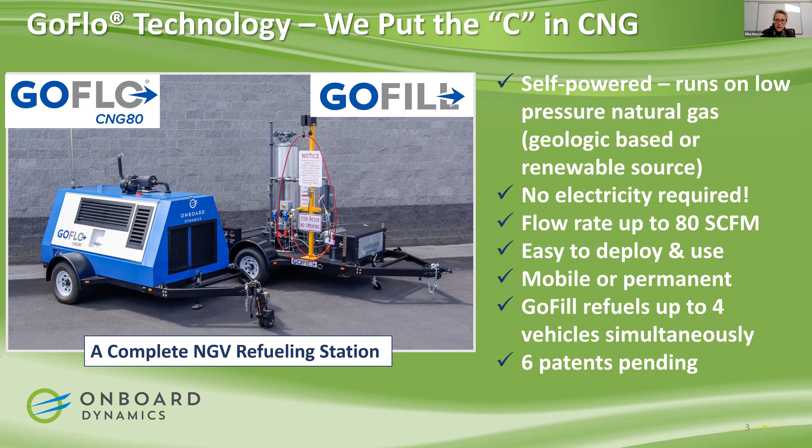So when the GoFill is packaged with the GoFlo compressor, it becomes a complete natural gas refueling station, all without electricity and mobile. So just a little bit closer look under the hood, so to speak, of our system. The core compressor platform is based on a V8 industrial engine, whereby 4 stages of compression are performed by one bank shown here and powered by natural gas using the other bank.

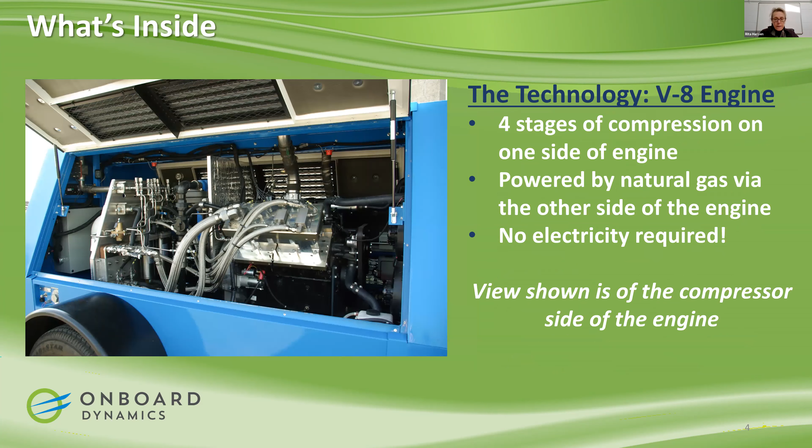And I just have to say, for this particular application this summer, we showed up at 10 a.m. in the morning with the GoFlo and the GoFill system, and by 3 p.m. we were refueling that truck with their local natural gas supply. So pretty easy and convenient for on-site refueling. We call it CNG in a day.

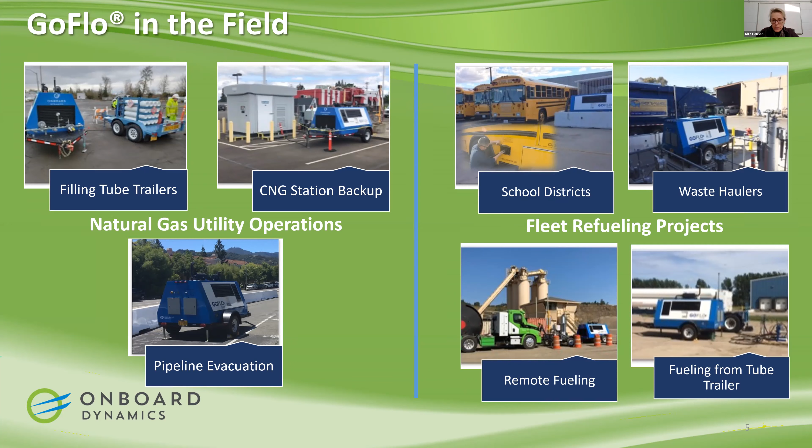So he is saving $1,000 per truck per month in fuel costs alone for his 12 trucks. So 12 grand a month in savings. By using renewable natural gas, he's reducing emissions by 22 tons of CO2 equivalents per truck each month. So that's a really motivating aspect of what we're doing. So that is what we sell today.

And really the ability to perform compression the way we do just brings us so many opportunities where that's important. And we're now seeing it's going to open up even larger markets beyond refueling and utility operations, which is why I'm here today to talk about the new innovation, because as part of our product roadmap going forward, we are going to be incorporating cleaning and conditioning capability on the front end of our core compressor platform. And this will allow us to go after renewable natural gas and flared stranded gas applications in a big way.

And these applications are already coming to us. So this is a solution to a methane problem that is ever growing. And since our product launch, customers and industry have been approaching us, asking us for this product that combines our unique natural gas compression platform with this upfront gas cleanup and conditioning capability.

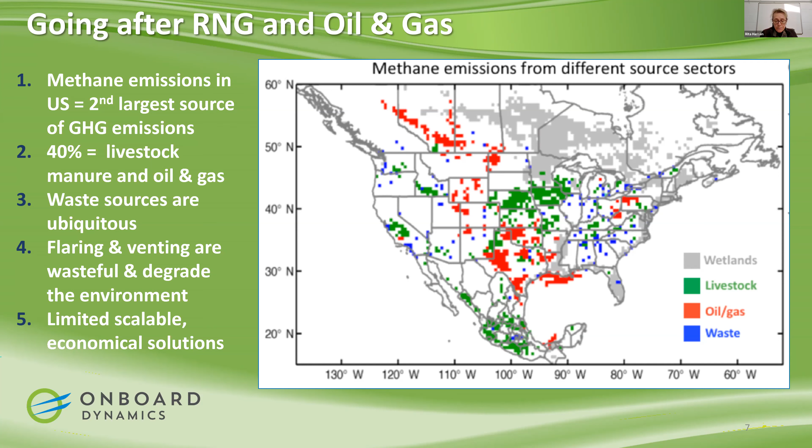It's also going to be electric and diesel free. It will be mobile on a self-contained flatbed trailer, and it's going to produce fuel grade methane that can be used for either local NGV refueling or transported via tube trailer to a pipeline or to be sold into other markets. And it will be cost effective. So we expect to hear about this proposal in the next 30 days.

We actually secured 14 letters of commitment and support from commercialization partners and industry players for the development of this solution. Some of you who've made those commitments are on this webinar today. I know that. And we already have 2 demonstration sites committed, both on the dairy side here in the Pacific Northwest and on the oil and gas side in Texas.

So our timeline on this fully integrated system, once we get notified that we're moving forward, would be actual deployments in 2022. So it's basically a year to get the funding in place for this product development and to do the engineering and build out the first systems. And we're targeting 4 demonstration sites, 2 on the RNG side and 2 on the oil and gas side.

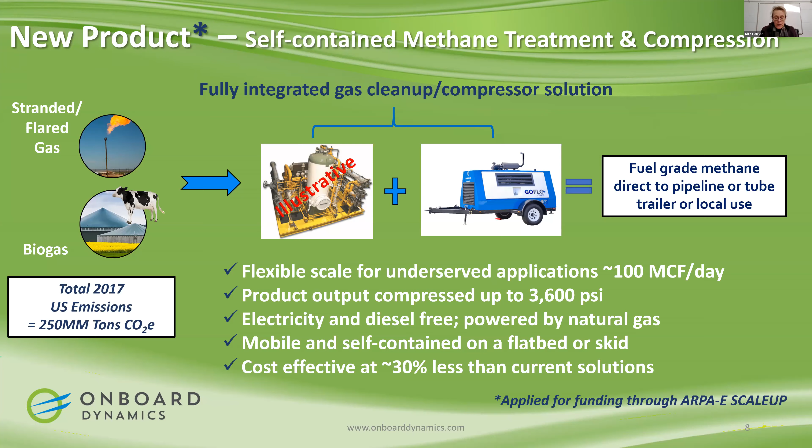So since there might be customer prospects on this webinar, I would be remiss if I didn't talk about what we're selling today, our current product offerings. So, as many of you know, we're actually in a direct sales capacity. We're selling our compressor, we're selling our refueler, we're selling it as a package, but we also are offering leasing and compression as a service opportunities and service and support contracts and cloud-based data management packages based on the back-end data collection capabilities that we have built into the product.

And just as a go-to-market, since you're kind of part of my local support ecosystem, we have received significant US interest and also international interest. I have to tell you that I was this morning talking to somebody in London, and yesterday I was corresponding with somebody in India. But we're focused here in the US right now on transportation refueling and supporting natural gas utility operations through our methane mitigations. But we really are super excited about the fact that we're on people's radars outside of the US.

And we are going to be deploying our first compressor into the Canadian market with our partner in BC. And through our contract with NRCan, we're actually getting support to get all the certification requirements to be able to deliver that system. So that's super exciting for us. So it's US first, Canada second, and I'm thinking it's Mexico and Latin America after that, but India's got such a strong pull as well.

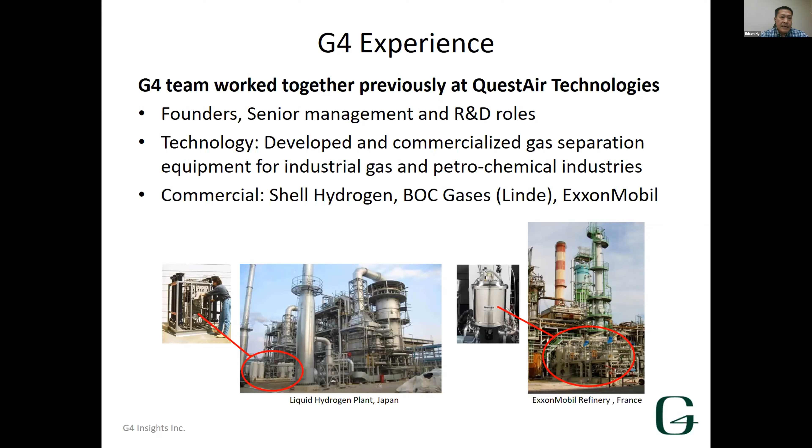What we found was that methane, if you can make it a pipeline grade product, did have an immediate and large and growing market for renewable natural gas with gas utilities. One of the challenges we found was that a lot of the existing sources, being landfill sites and digester opportunities, are already actively pursued. The big sites are probably already done, and the feedstock opportunity was going to be diminishing over time. So in our current company, G4 Insights, we didn't want to pursue further technological development in those feedstock types. What we are focused on is the next feedstock opportunity, which would be primarily forestry biomass.

So when the forest industry goes out to harvest trees for making lumber, the tops of the trees, the branches of the trees, all of that is left behind as roadside debris, generally just gathered and burned. And then at the mill site, there's the mill waste from the sawdust, the bark and the other materials that are left behind. Sometimes it's used for pellets. Sometimes the quality is not good enough for that even. So again, it's just a waste product.

And what we do in our process is a little different than some of the other technologies being developed, in that the more conventional approach is to take the biomass and gasify it. That means to heat it under quite high temperatures, like 800-900 degrees C, to create a syngas, which is primarily hydrogen and carbon monoxide, and then convert that into methane using the methanation process. That process is generally quite complex and quite expensive, because the syngas needs to be a very clean, tar-free product that doesn't foul up some of the catalysts in the methanation step.

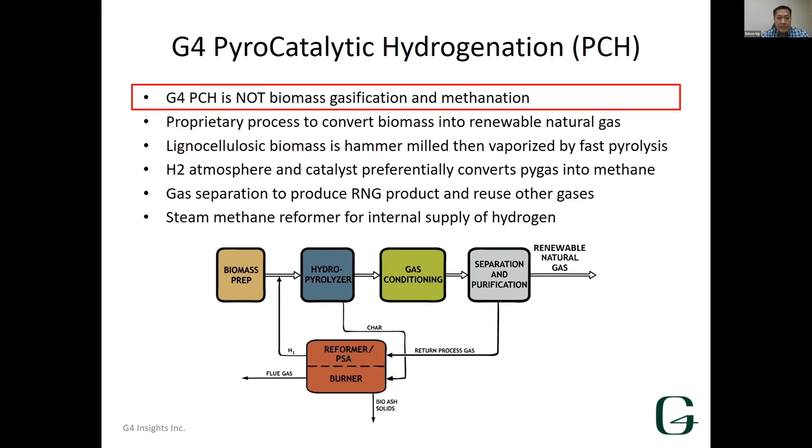So that's our technology. And at a commercial scale, our next project we're targeting, we believe entry-level size is roughly about 36 dry tons of biomass a day. Output from that unit would be about 450 gigajoules a day of renewable natural gas. CapEx roughly 20 million, and selling price for the numbers to work is about the current renewable natural gas in North America, and in Europe it can be up to double that. So that's a worthwhile entry point at that scale.

Where we want to get to in North America, of course, is that we do have larger forestry operations, and sizing something that matches the available residue from a typical larger North American sawmill, there's about 750 dry tons a day of biomass available. And that would produce about 10,000 gigajoules a day of renewable natural gas. CapEx for a larger plant like that is about 140 million.

And because of scaling, we can actually still make money in the sort of $12 to $15 a gigajoule range, which is extremely competitive, especially when you consider the scale at which we're producing this. So instead of poking many, many holes for small biogas plants to inject into grid, you're putting essentially a wellhead size injection for each of our large plants. So it's very attractive for the gas industry and of course the investors in the plants.

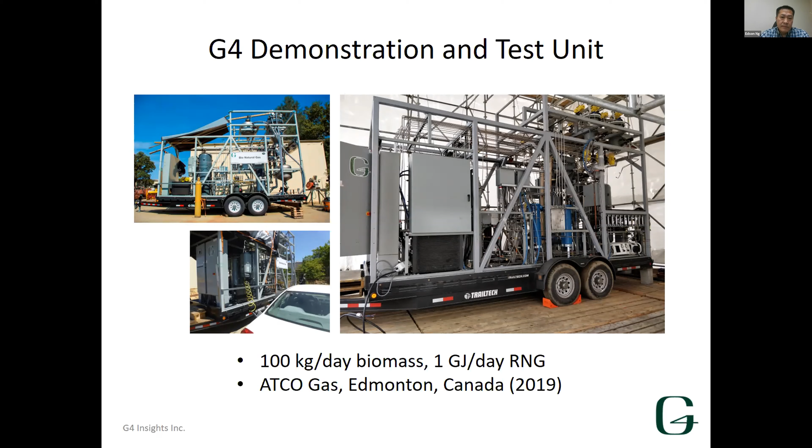Some of the other applications that we have for this technology: previously I described that we can make renewable natural gas, and we also needed hydrogen as part of that input. What we can do in power to gas, and where this comes into play, is that with the growth in wind and solar projects, there's a lot of overproduction of renewable power when the wind's blowing and the sun's shining, and it doesn't match the usage profile.

So the utility industry is looking at things like storage of that power, whether it's batteries or flywheels, compressed air, pumped hydro. Some of the larger scale opportunities is to convert that excess renewable grid power with electrolyzers and make hydrogen. And then the hydrogen could be used for end uses like fuel cell vehicles and things like that. But in the meantime, you could also use our technology to convert that hydrogen into renewable natural gas.

And the platform to do that is exactly as I described before, except we don't need an internal supply of hydrogen because we'll use an external supply of hydrogen, and that displaces the need for the steam methane reformer. It also eliminates the need for us to sacrifice some of our methane as the feedstock for that hydrogen. The result is we double the output of the renewable natural gas produced. So we can get 20,000 gigajoules a day from the same amount of biomass going in.

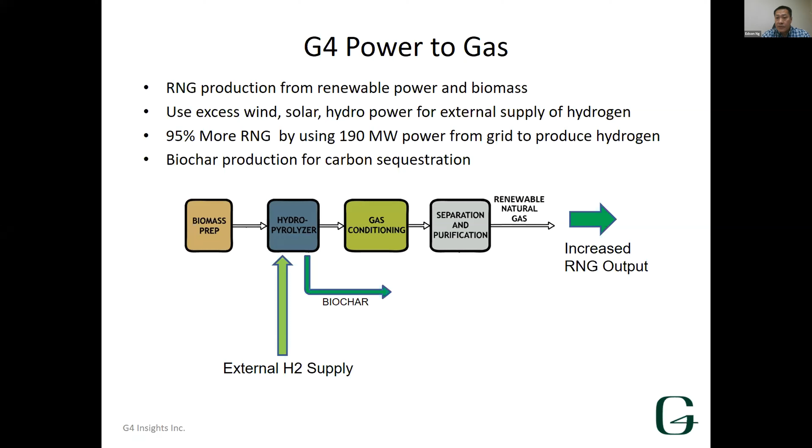And to give a sense of the scale at which we're able to offload the excess grid power, one of our large plants would use about 190 megawatts of power to produce the hydrogen on a steady state basis. But the peak period that you want to draw this excess grid power is about 8 hours of the day. So during peak times, it's about triple that. So imagine 600 megawatts of excess grid power coming off the grid to make the hydrogen and then into a single large RNG plant. So that's a lot of storage. In this case, it's transforming low or negative price power into a high value CNG or RNG product. So that's power to gas.

Another application for the same technology is green hydrogen. Right now, it's RNG focused for the industry. Most of the roadmaps, whether it's North America or Europe, foresee a very large growth in hydrogen. A lot of that's driven by the wind and solar opportunity that I mentioned previously. But we can also participate in that by combining biomass and conventional steam methane reforming technology. So I'll describe this green hydrogen concept.

We take biomass, we use the G4 technology to make renewable natural gas and a biochar. That gets fed to a steam methane reformer where the feedstock is not fossil natural gas, but renewable natural gas. The burner is being fueled by biochar instead of methane. The output of the burner, the flue gas, is no longer a greenhouse gas because it's biochar going in. So you don't need to chase the CO2 in the flue gas, which is very difficult and expensive.

The output is a hydrogen-rich gas from the reformer. It goes into a G4 gas separation system, which produces two streams. One is a high purity hydrogen stream, which is green hydrogen. At the same time, we're able to isolate the CO2 stream from the reformate, such that you have a low cost, high purity CO2 stream available for sequestration. So you can get negative carbon intensity green hydrogen using this technology.

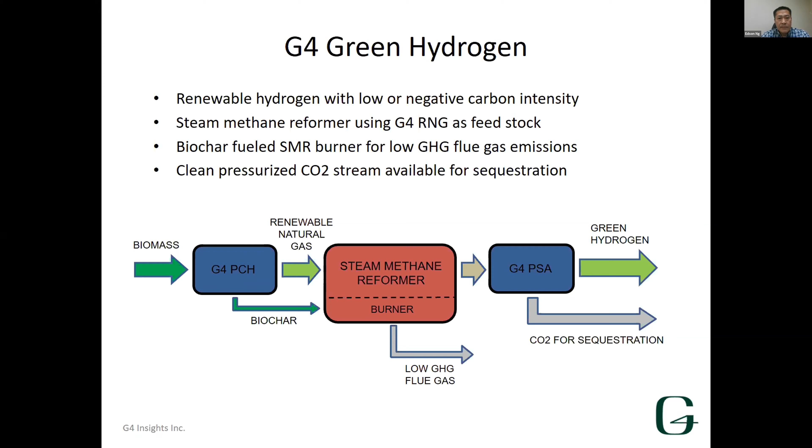And the last example is blue hydrogen. It's a similar approach, but the twist here is that we're using fossil natural gas into the steam methane reformer as the feedstock. However, on the burner for the steam methane reformer, we're using renewable natural gas produced using the G4 process. The flue gas is carbon neutral because it's renewable natural gas going into the burner. There's biochar being produced that is not being utilized, so that sequesters carbon.

The reformer outputs the reformate into the G4 gas separation unit, which produces, in this case, high purity blue hydrogen, which means it comes from fossil fuel origins, but it's low carbon intensity. At the same time, we're capturing CO2 from the reformate stream available for sequestration. So in this approach, we're also producing low carbon blue hydrogen with negative carbon intensity as well. So these are all the scenarios with the same technology that we can pursue today.

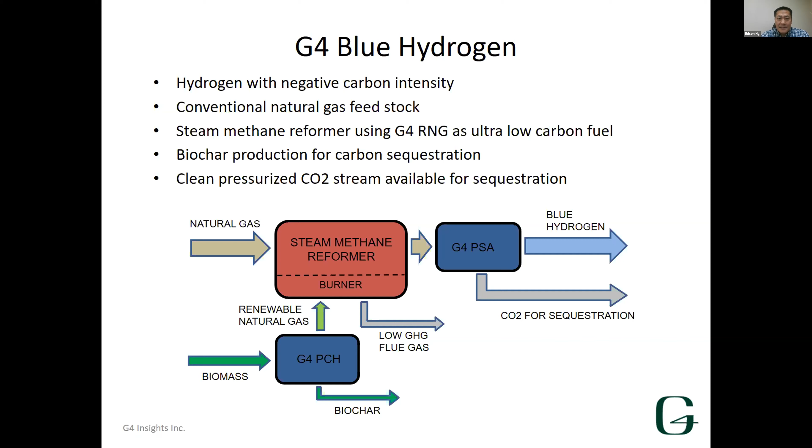Great, thank you, Edson. That's terrific. I didn't have any questions for you. I had a dozen questions going through my head. That was a very rich presentation.

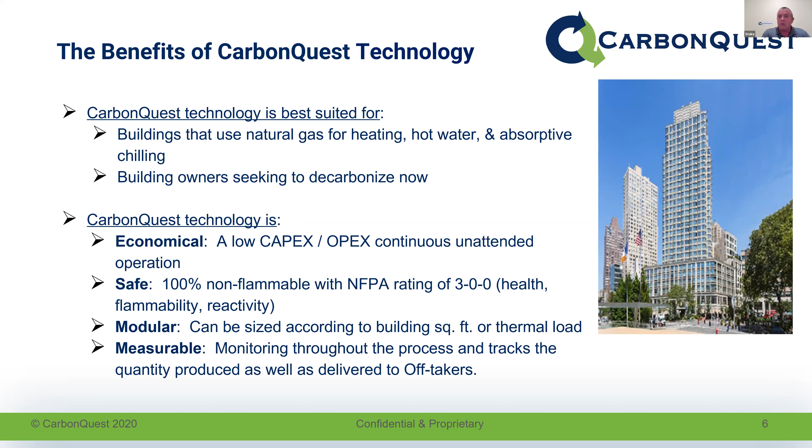And so what we've put together, we think is economical. It's got a low CapEx perspective. It's safe for installing systems in a building. It's modular. We can size this up and down based upon the usage in the building. And more importantly, it's measurable. So we're able to measure the carbon that we're capturing and liquefying and then transporting out. I'll go through that here on this slide.

So what we do is we attach to the flue from the boiler systems, and we divert and we size our system to be able to optimize production based upon the range of operation of the boiler systems. The first stage, we go through a condensing and a cooling phase, where we'll cool it to draw out the liquid in the exhaust. So pull the water vapor out and liquefy it.

And then we'll take that dry gas, we'll move it over into the separation and purification stage, where we'll first compress it, and then we'll run it again through another dryer, a heatless dryer, and then we'll run it into a pressure swing adsorption system. This happens to be a system produced by Xebec, who bought the company that Edson helped found earlier. So it was a very interesting coincidence that we're on this session together, Edson.

And then from the PSA, it does the gas separation, where the remaining oxygen and nitrogen is put back into the flue. The CO2 is passed over into the liquefaction phase, which is again a series of compression and cooling, and stored into a vacuum jacketed tank that gets further cooling and stored.

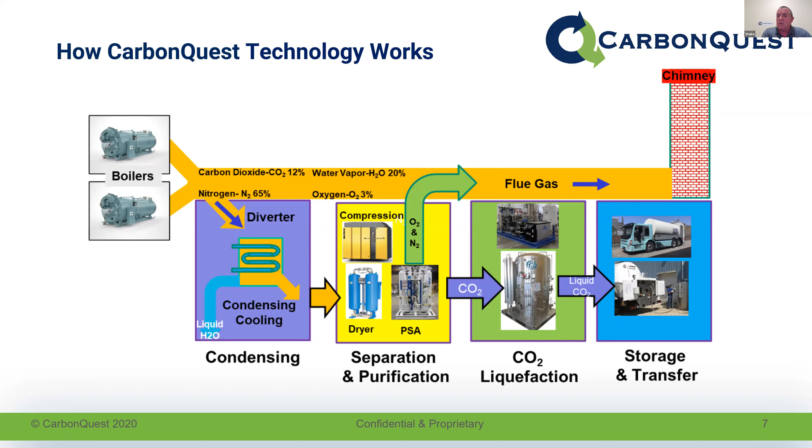And then we will produce at peak heating season at this first building about 3 tons of carbon dioxide about every 2 days. So we will pump it up to trucks. We have been working with off-takers to take the CO2 to be used in various applications that will sequester the CO2 as far as its application and use.

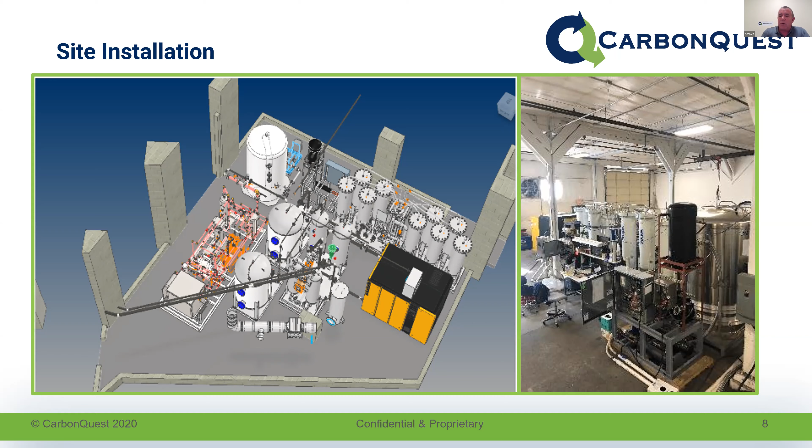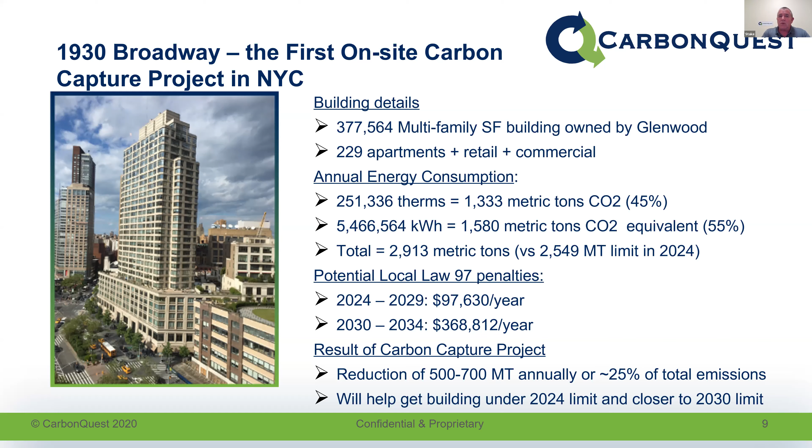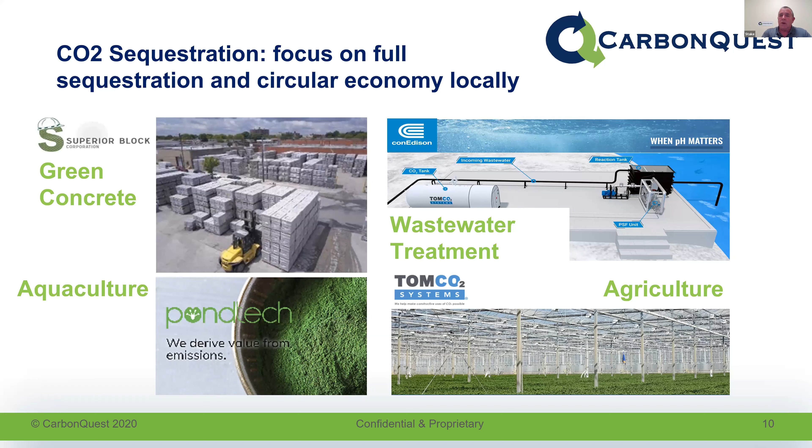We're very interested in the aquaculture markets that are developing. There's a company in Canada, Pond Tech, that develops bioreactors that use CO2 to create algae. And there's a wide variety of markets for algae around the world. And then agriculturally, using CO2 in greenhouses has proven very effective as far as improving greenhouse growth production. So good opportunities to take and transform that CO2 that we capture and put it into new emerging markets as well. So that's what we've got.

That's what we're up to. And I look forward to your questions.

Thank you very much. Well, Doug, I have one, and that is, the application for CarbonQuest currently is in large commercial or multifamily residential buildings in New York City. Obviously, we have some of those out here, maybe not as densely built as in New York City, but are there other opportunities beyond the building sector?

So I think of industrial applications or even, say, compression, natural gas compression facilities and the like. Are there applications like that for CarbonQuest technology? You know, there are applications. And as a matter of fact, we have been out working with one of the local gas transmission companies here, pipeline just south of town here. And we walked through their facility to understand their usage.

And what it boils down to is when you look at the opportunity as far as monetizing the CO2 sequestration, it's just a matter of economics. That's why New York is very lucrative right now based upon that structure. It's hard to do today unless there are other economic drivers, just to base it on the offtake value of that CO2. So you need a little extra kick, like some of the 45Q tax potential that's out there.

But we do think other markets will evolve, and we're just focused in New York because that's where the incentives are in place that will allow us to expand and grow rapidly while other markets mature. We're actually seeing some interest in Tokyo as well. But I do think that there's areas in the Northwest where this could be applied and beneficial for carbon sequestration.